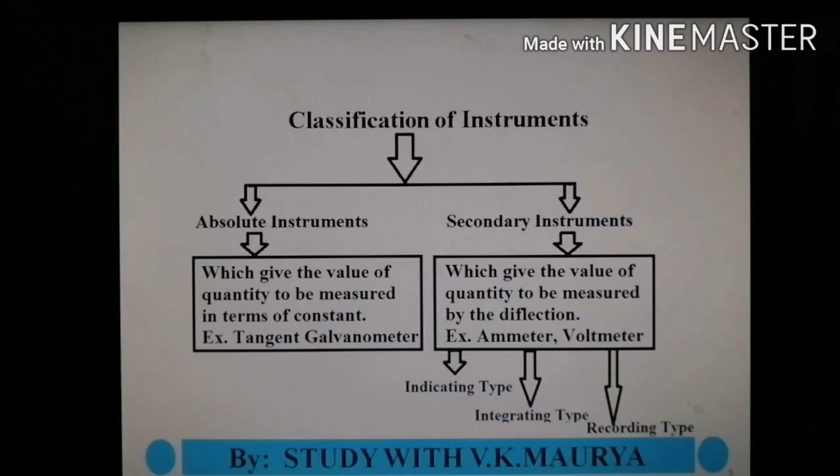Before these topics, see the classification of instruments. There are two classifications: one is absolute instruments and the second is secondary instruments. The absolute instrument gives the value of quantity to be measured in terms of constant, like tangent galvanometer. The secondary instrument gives the value of quantity to be measured by deflection, like ammeter and voltmeter. Secondary instruments are further categorized in three categories: indicating type, integrating type and recording type.

See the first one, that is indicating type instrument. Those instruments which directly indicate the value of electrical quantity at the time when it is being measured are called indicating type instruments, like voltmeter, ammeter, wattmeter, etc.

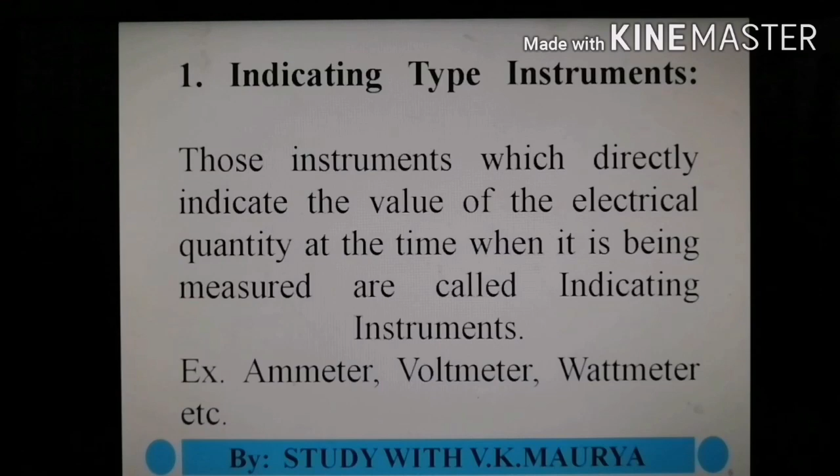The second one is the integrating type instrument. Those instruments which measure the total quantity of electricity in a given period are called integrating type instruments, like ampere hour meter, watt hour meter, etc.

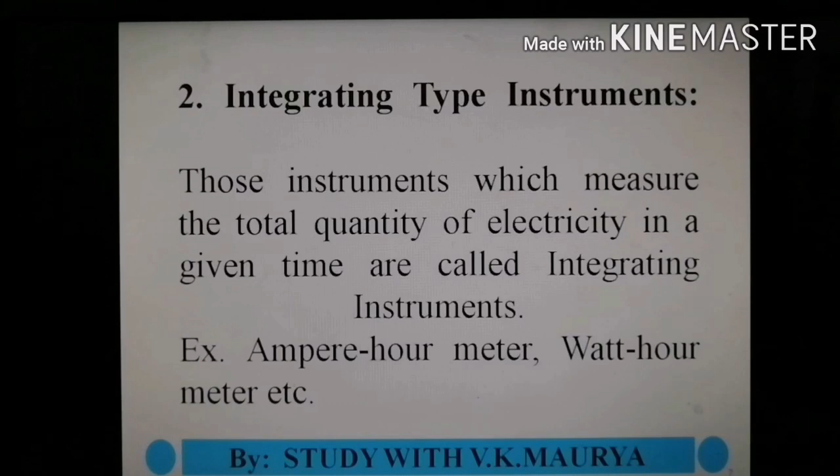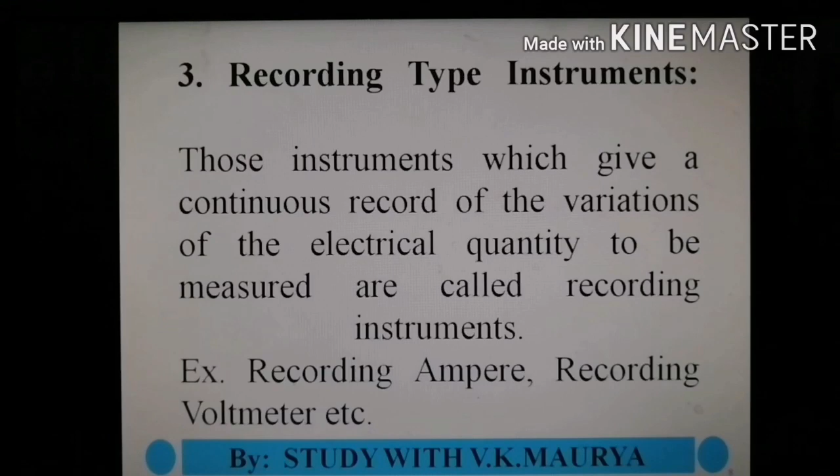And the third one is the recording type instrument. These instruments which give a continuous record of the variation of electrical quantity to be measured are called recording type instruments, like recording ampere meter, recording voltmeter, etc.

Now, indicating type instrument. In the case of indicating type instrument, three torques are required. This is our topic, different types of torque, right? Number one is deflecting torque, which is nothing but operating torque. Second one is controlling torque, also known as restoring torque. And the third one is damping torque.

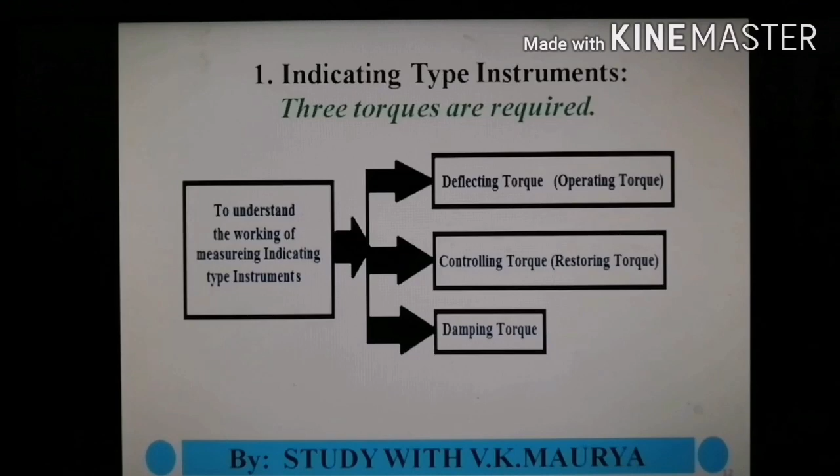Now see these torques one by one. Number one is deflecting torque. When the instrument is connected in the circuit to measure the given electrical quantity, deflecting or operating torque is produced, by which the pointer will move on the calibrated scale. It is one of the essential components required for the indicating type instrument.

I am explaining over here the effect of overswing. Although the current in this wire is 4 ampere, the pointer shows up to 5 ampere. Why is it so? The pointer will move from the 0 position up to 4 ampere, and due to inertia it will overswing beyond 4. This is known as the effect of overswing. Due to this torque, that is the deflecting torque, the pointer will swing over the maximum deflected position, irrespective of the magnitude of the quantity to be measured. Although the quantity is 4 ampere, due to the overswing its reading is more than 4 ampere.

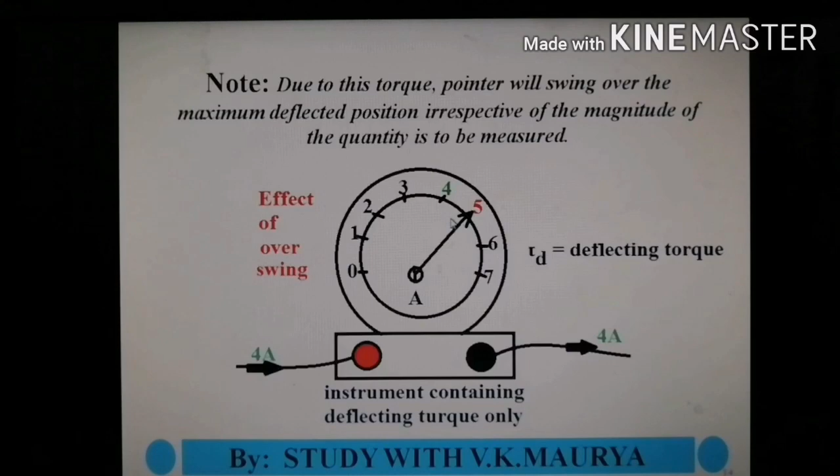Now the second one is the controlling torque. To avoid such conditions of over deflection or overswing, an opposing torque is necessary, known as controlling torque or restoring torque. This is the second essential component for the indicating type instruments. There are two types of controlling torques: one is known as spring control, second is gravity control. Now see the effect of controlling torque.

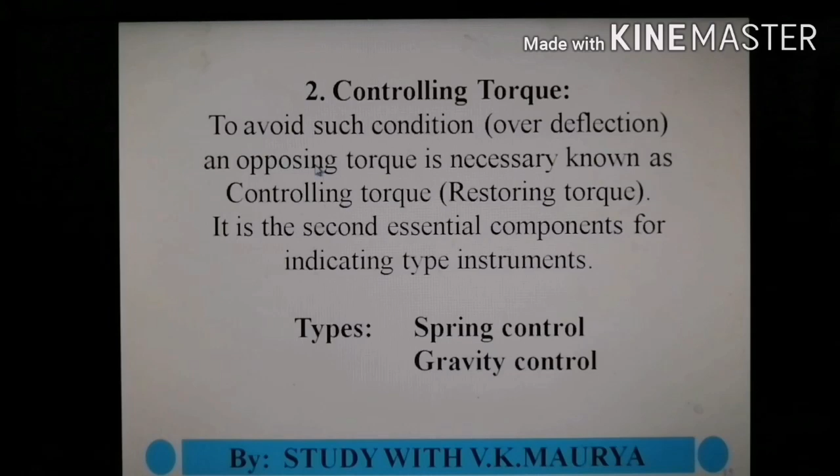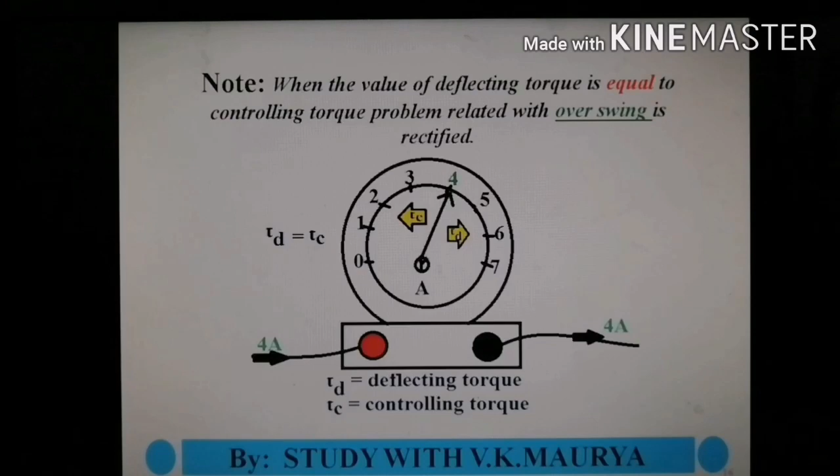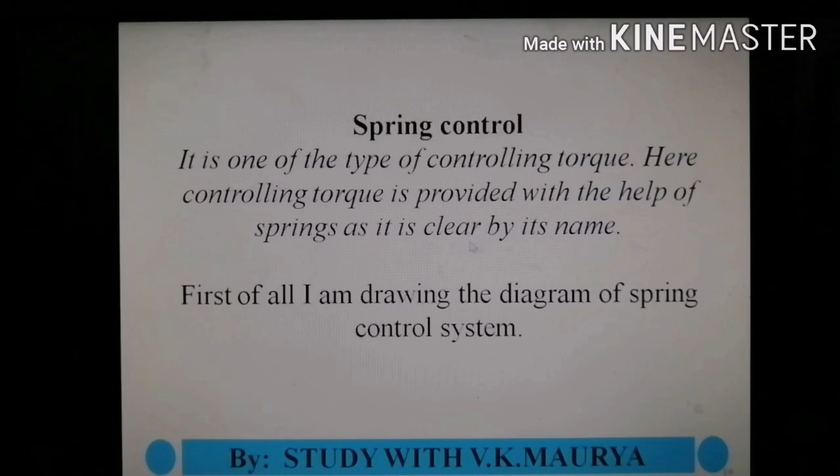These are the two types. Now I am going to explain one by one. The first one is spring control. First of all, the definition: it is one of the types of controlling torque. Here, controlling torque is provided with the help of spring, as is clear by its name.

See, this one is the spindle. These are the two springs, known as the control springs, and these springs are tightly attached with the spindle, which is provided for the controlling torque.

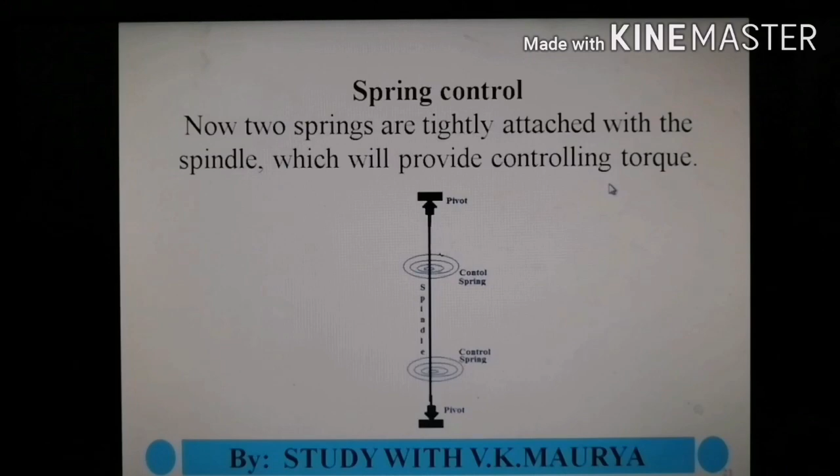After that, the pointer is also attached with the spindle, so that pointer will also move according to the effect of the spring.

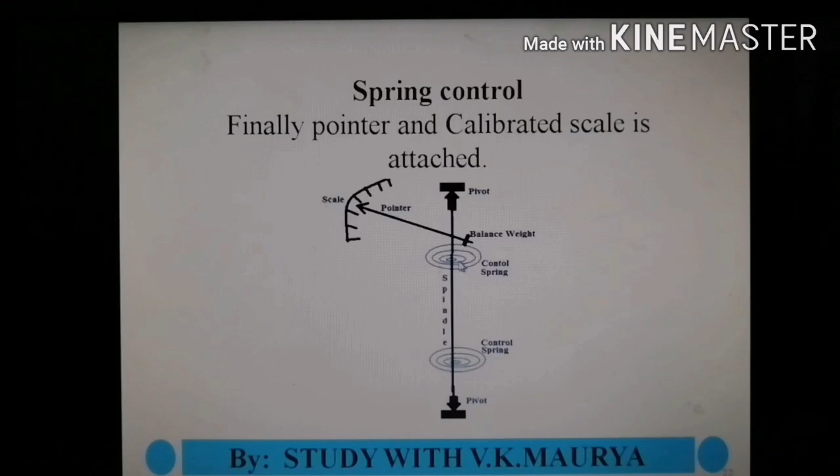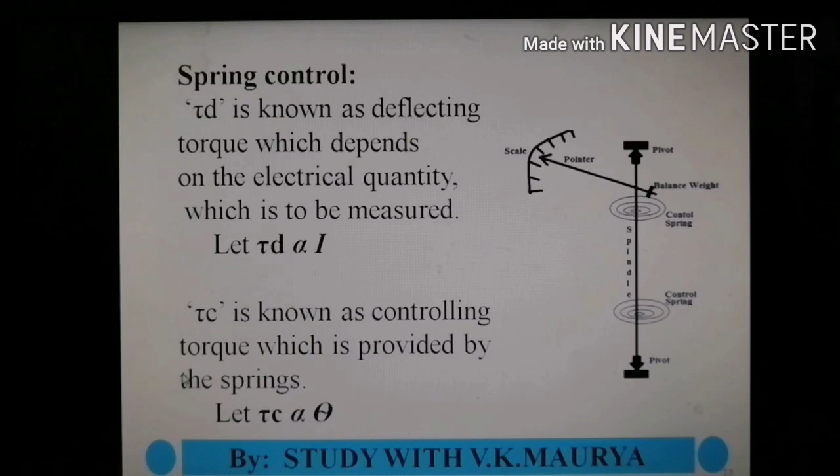Tau d is known as the deflecting torque, which depends on the electrical quantity to be measured, so tau d is proportional to I. Another torque given by the springs is known as the controlling torque, tau c, which is proportional to theta. At steady state, the pointer comes to rest when tau d equals tau c, meaning I is proportional to theta. This shows that deflection is directly proportional to the current, and the scale is uniform.

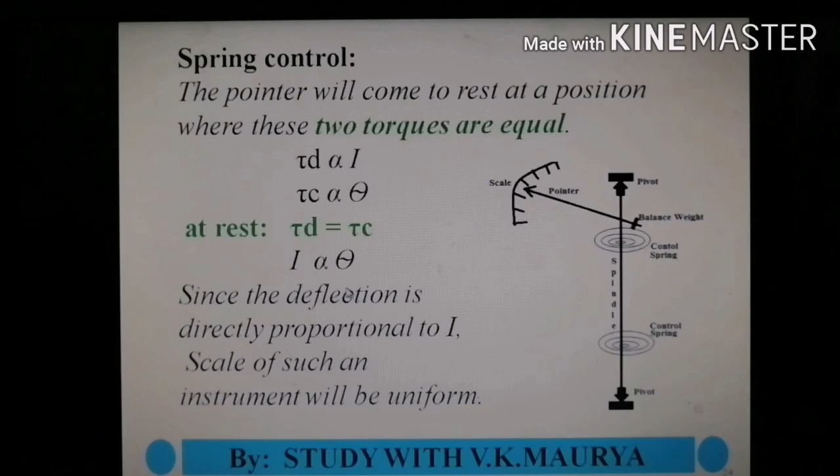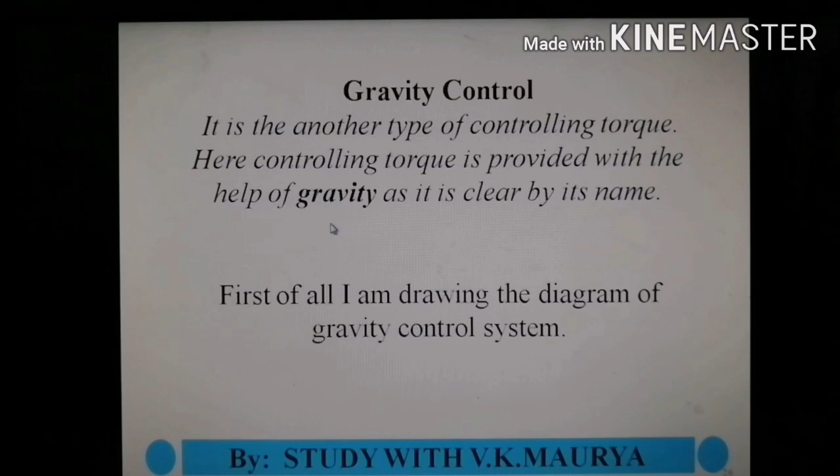Now the second one is gravity control. First the definition: it is another type of controlling torque, where the controlling torque is provided with the help of gravity, as is clear by its name.

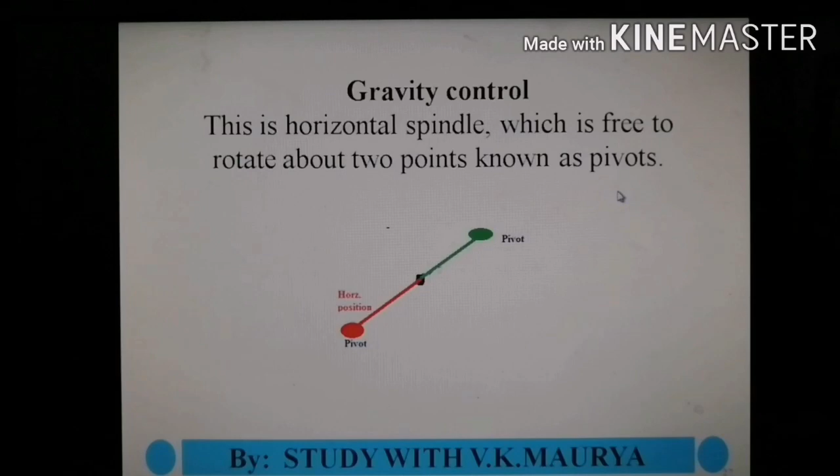This one is the spindle, a horizontal spindle which is free to rotate about its pivoted points. The pointer is attached with the horizontal spindle, and there are two weights known as the balance weight and control weight also attached with the pointer.

There are some important points. First, the position of such an instrument is always vertical. Second, the scale of such instruments is non-uniform — it is crowded at the start and spread at the end.

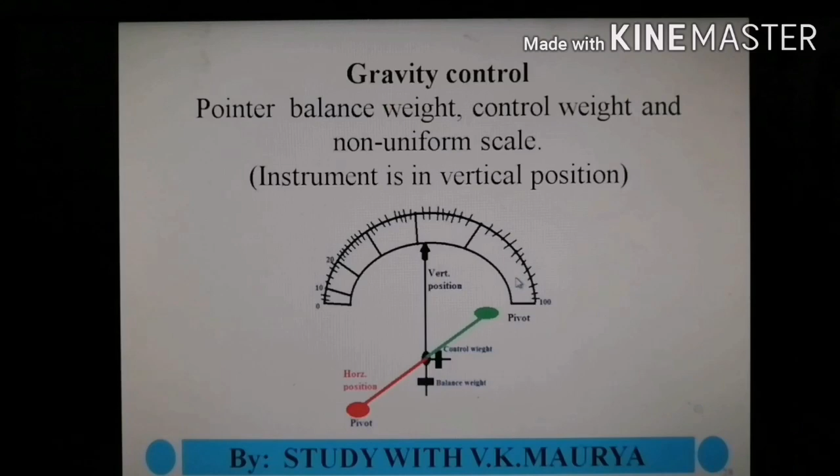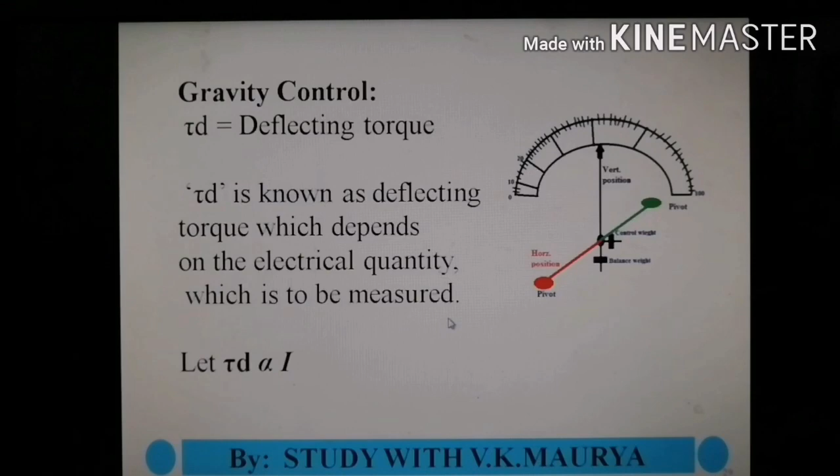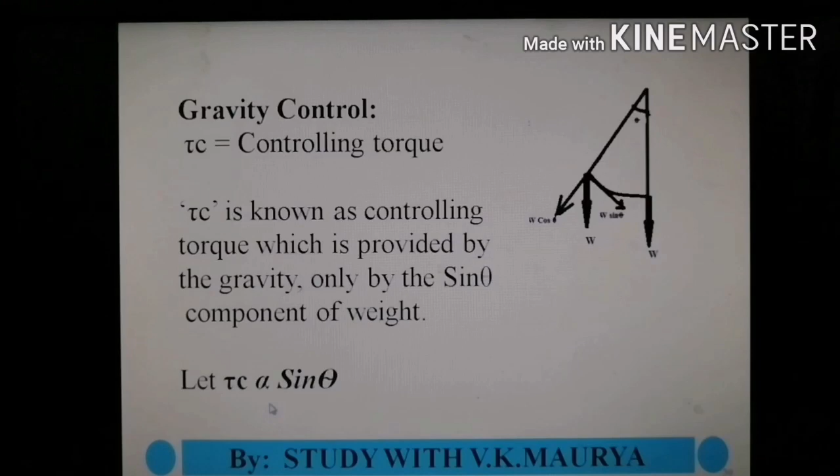Now what is the working of that? The deflecting torque is once again provided by the electrical quantity to be measured, so tau d is proportional to I. But in the case of the controlling torque, it is provided by gravity, or one component of the controlling weight, that is the sine component. So controlling torque is proportional not to theta, but to sine theta. That's why at steady state, when the deflecting torque equals the controlling torque, I is proportional to sine theta.

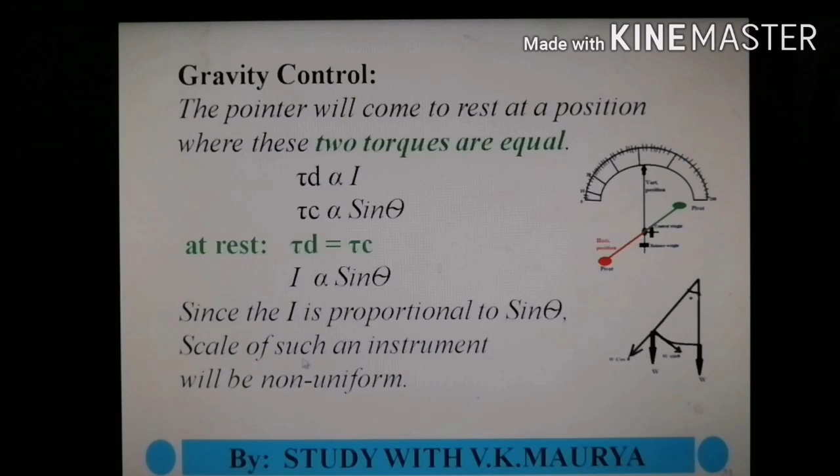I is proportional to sine theta, and the scale of such instruments will be non-uniform.

Now see the comparison chart between spring control and gravity control. First the advantages: in the case of spring control, it is accurate, sensitive and has a uniform scale. In the case of gravity control, advantages are accurate, sensitive and cheaper.

Now the disadvantages. Spring type instruments are costly, but gravity type are cheaper. There is fatigue in the case of spring type, but gravity type is free from fatigue. Spring type is dependent on temperature, while there is no effect of temperature in gravity type. There is no effect of position for spring type, but in gravity control, vertical position is necessary. The disadvantage of gravity control is a non-uniform scale.

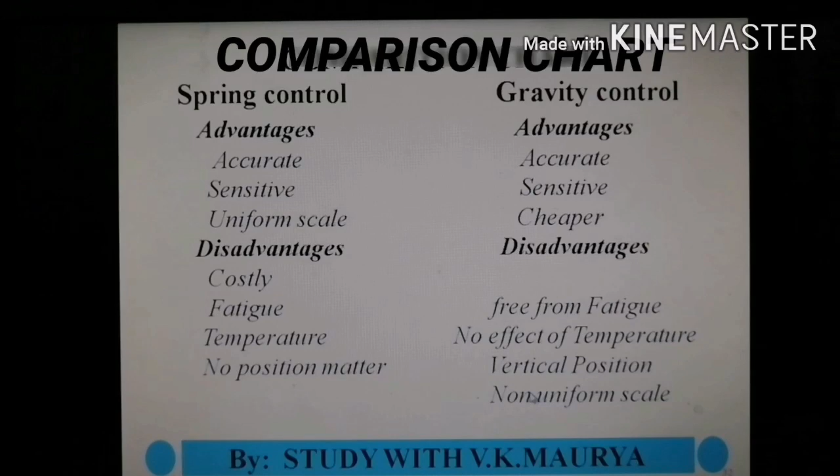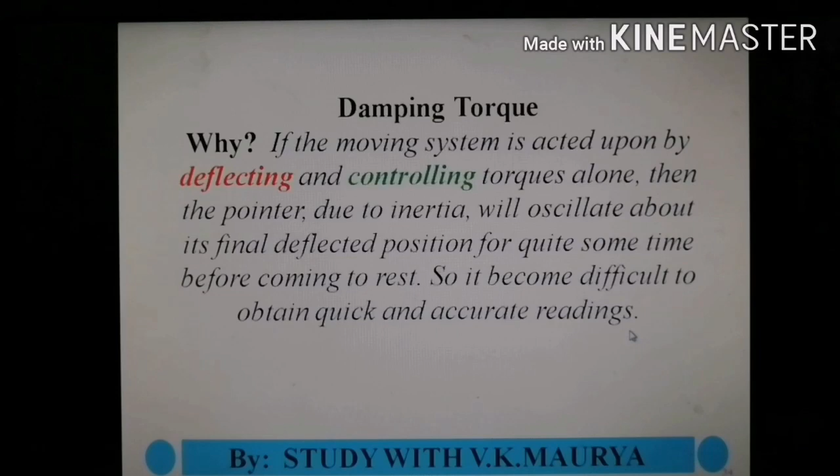Now the third component, that is damping torque. First the definition: if the moving system is acted upon by the deflecting and controlling torques alone — listen carefully, only these two torques — then the pointer, due to inertia, will oscillate about its final deflected position for quite some time before coming to rest, making it difficult to obtain quick and accurate readings.

That's why damping torque is required. In order to avoid these oscillations of the pointer and bring it quickly to its final deflected position, a damping torque is provided in the indicating instruments.

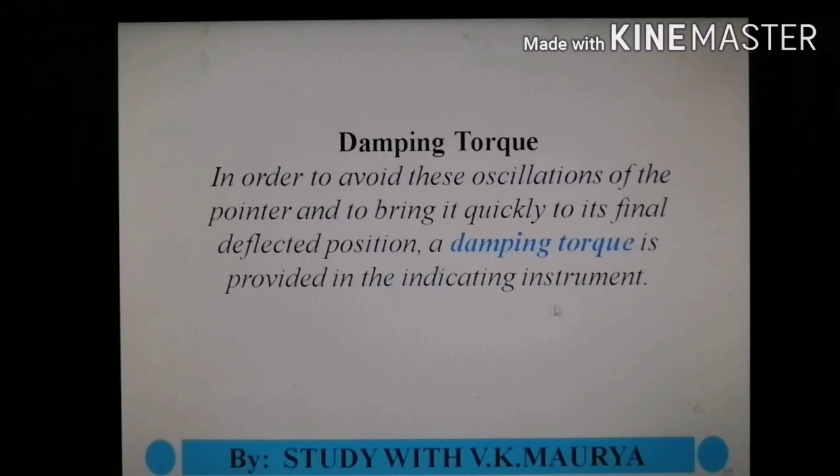Now listen about the damping torque. It is a self-adjusting torque that acts only when the pointer is in motion, and it opposes the motion. Damping torque does not act when the pointer is stationary.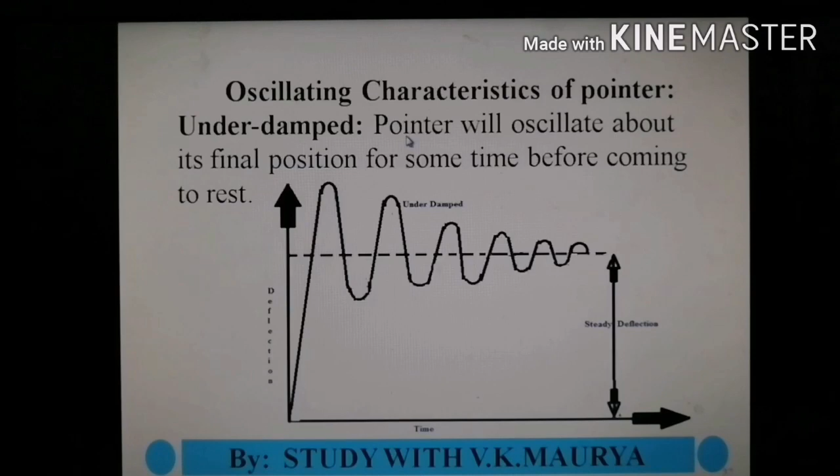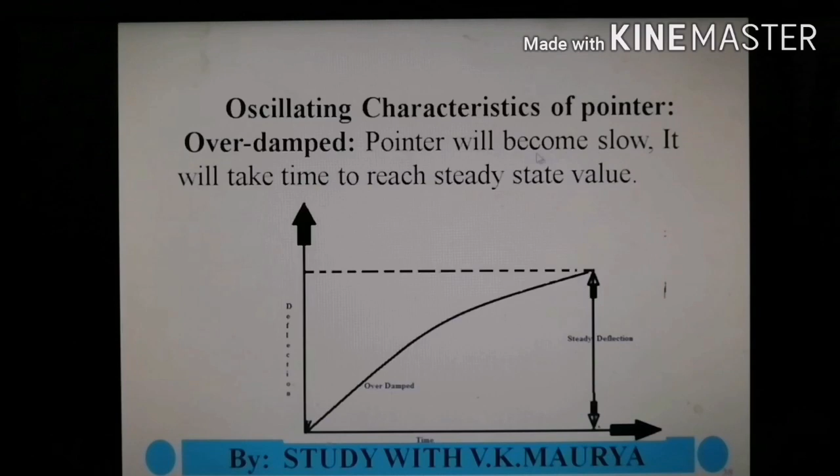Second one is the overdamped oscillations. The pointer will become slow and it will take time to reach the steady state value. Such type of oscillations are known as overdamped. The steady state position is achieved by the pointer with a lot of time, so it is known as overdamped.

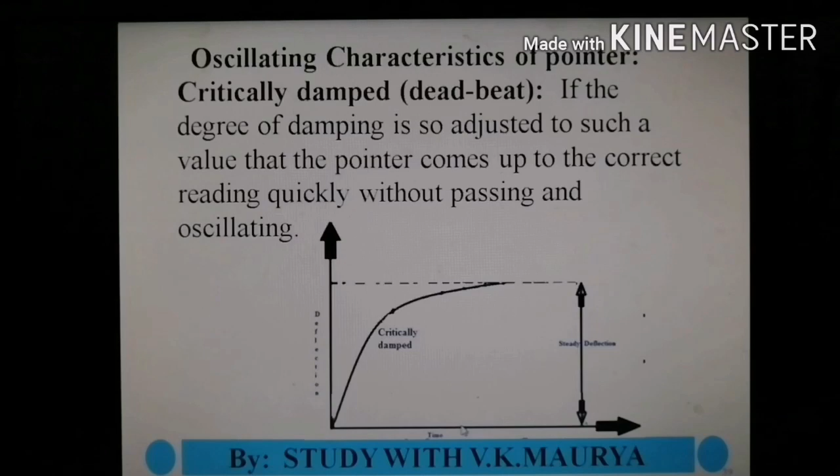Now third one is the critically damped or deadbeat oscillations. If the degree of damping is so adjusted to such a value that the pointer comes up to a correct reading quickly without passing it and oscillating. This one is the steady state value, and it is achieved by the pointer only in this time. That's why it is known as critically damped.

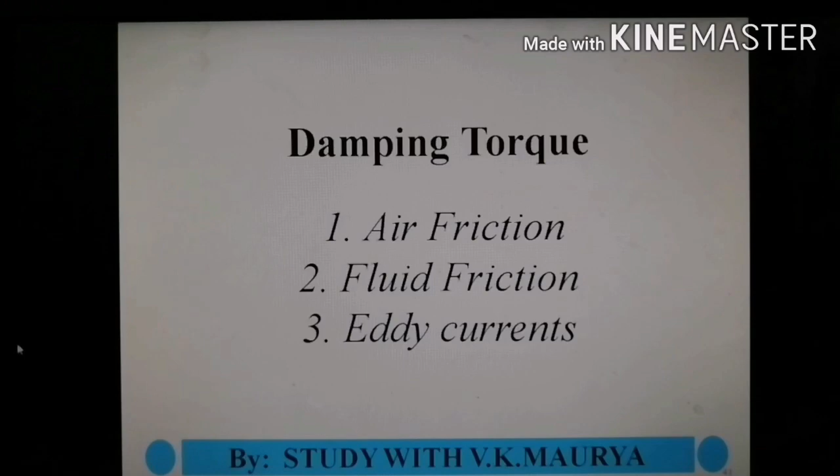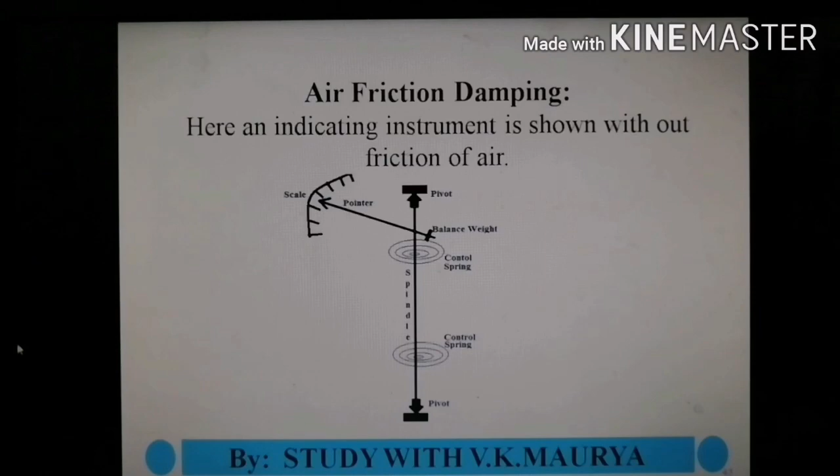See the first one, air friction damping. This is the normal arrangement: spindle, springs, pointer, scale, pivoted points, etc. Now see the arrangement of air friction damping: this one is the air chamber, this one is the piston, and the rod of the piston is attached with the spindle. There is a small hole for the flow of air.

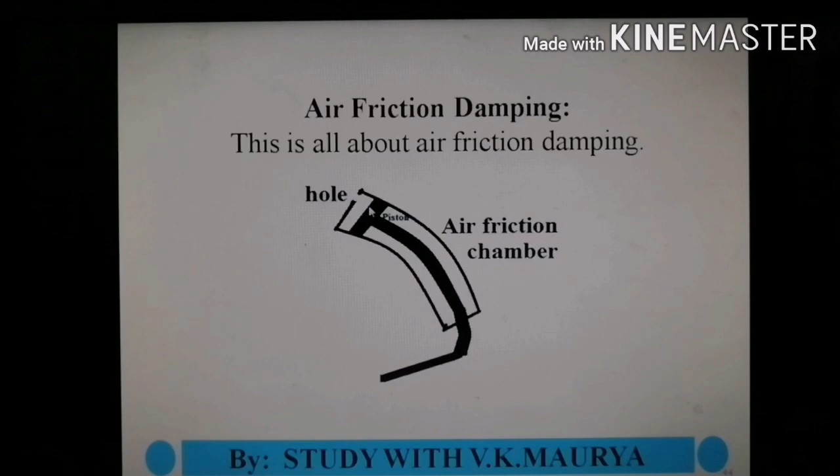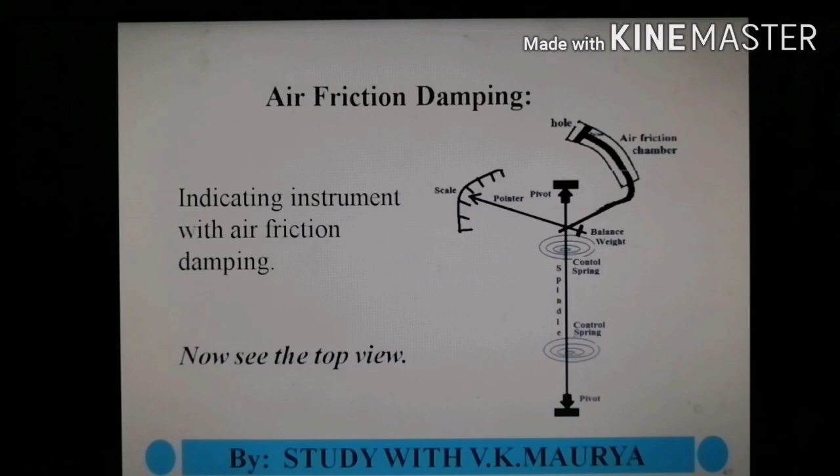Now see the air friction damping. According to the motion of this pointer under deflecting torque and controlling torque, smooth motion is provided to this pointer with the help of air friction damping. So the pointer will reach up to the steady state position in minimum time without oscillating, without vibrating. This one is deflecting torque, controlling torque, but the pointer will reach its steady state position without oscillating and vibrating.

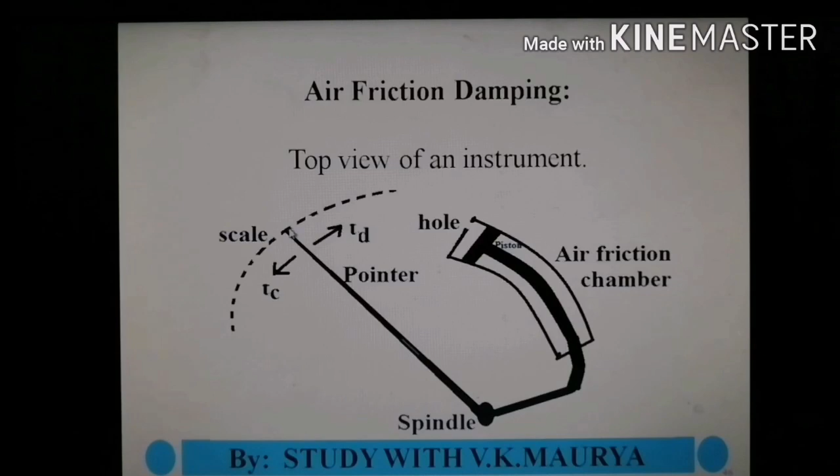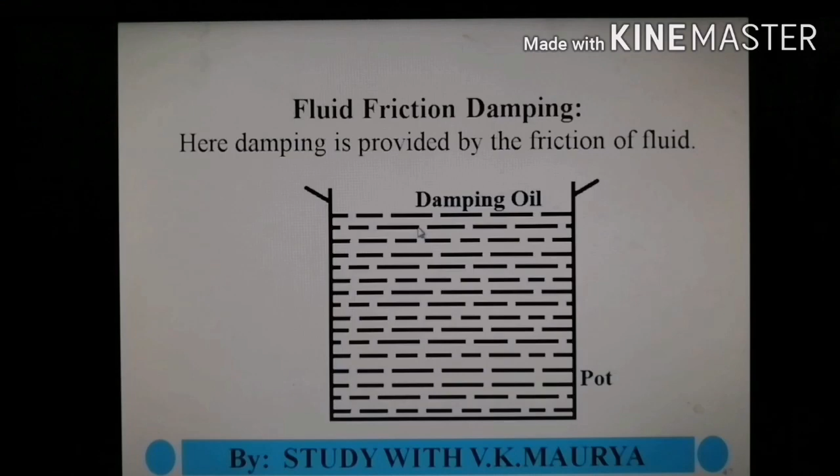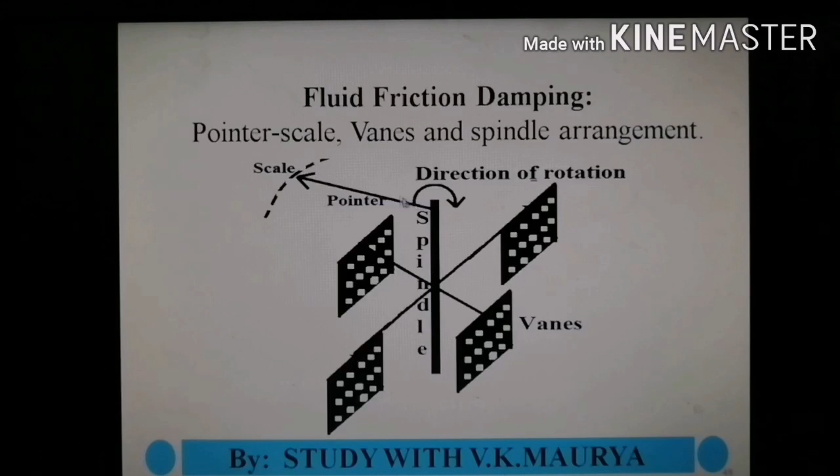Now the next one is fluid friction damping. In this case, a dense oil is here in this pot. These are the 4 vanes attached with the spindle, and the pointer is attached with the spindle. These vanes are inside the oil. Due to the high viscosity of this oil, smooth motion is provided to the pointer with the help of dense oil and vanes. There are small holes in the vanes through which fluid will pass.

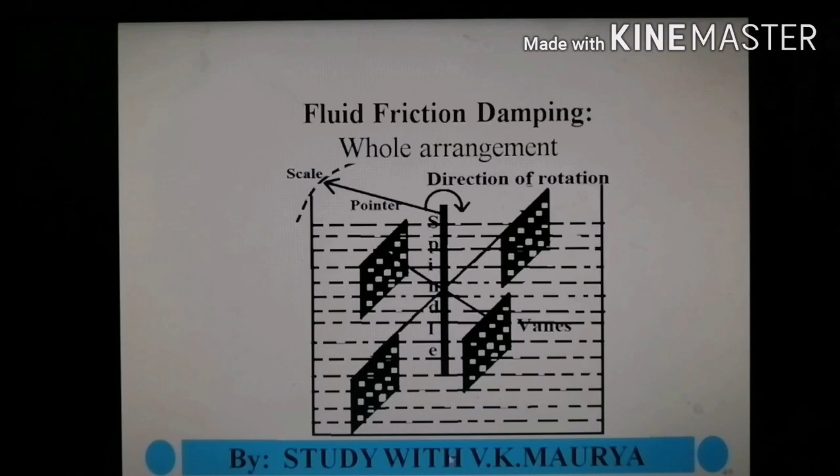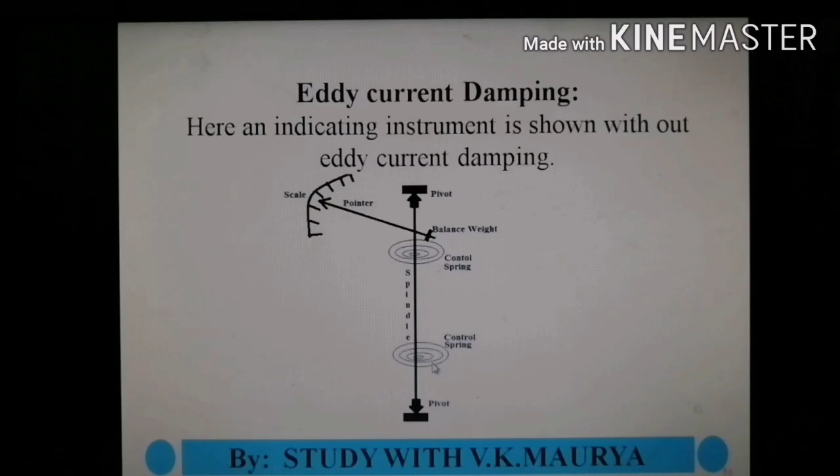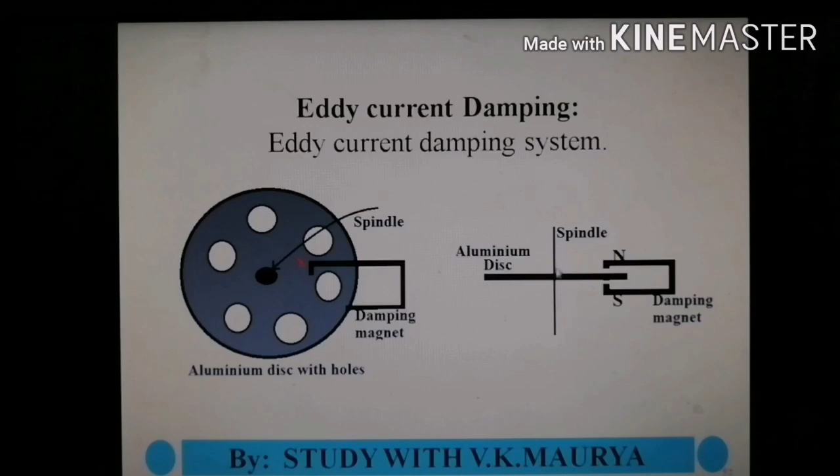Now the next one is eddy current damping. This one is a simple arrangement of the instrument: pointer, scale, spindle, springs, and pivoted points. Now see the eddy current damping. This one is the aluminum disc with so many holes, and this one is the spindle. The disc is free to rotate about the spindle and will pass in this gap. This one is the north pole, and at the other side there is the south pole of the damping magnet. B is the magnetic field produced by the north and south poles of the damping magnet.

There are a number of holes in the disc. When the disc rotates, the area changes. Due to the change in area and continuous magnetic field, it gives you change in flux as time passes on. That's why minus d phi upon dt gives you E, the induced EMF. When this EMF is divided by the resistance of the disc, there is a current known as eddy current, and it opposes the motion.

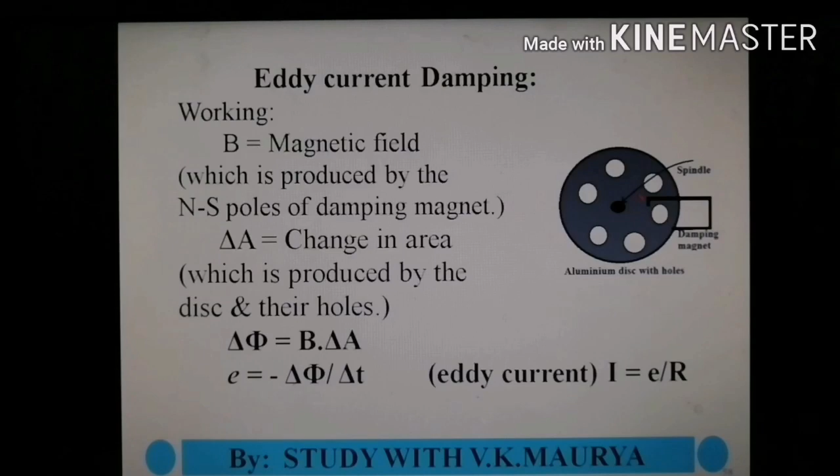See the working: B is the magnetic field produced by the damping magnet. Delta A is the change in area due to the several holes present in the aluminum disc. B into delta A gives you delta phi, the change in flux. As time passes, minus d phi upon dt is nothing but induced EMF. Once we divide this EMF by the resistance of the disc, there will be circulating currents known as eddy currents. These currents are responsible for opposing the motion, so it is known as eddy current damping.

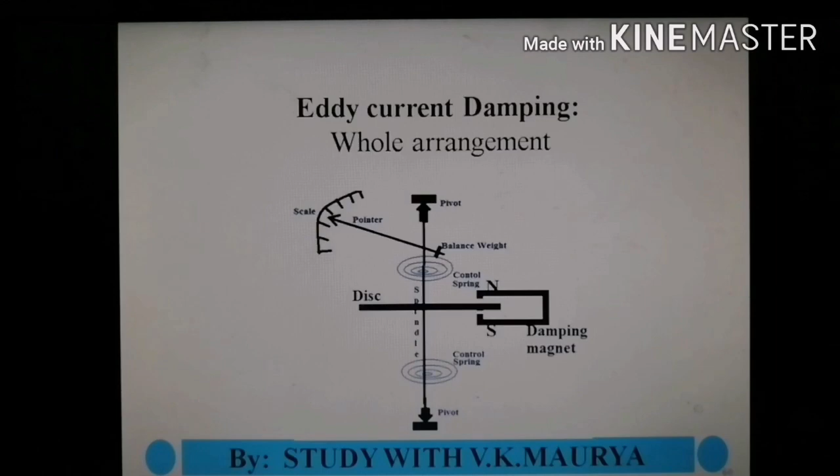Now see the instrument with the eddy current damping system. Now see what is the role of damping torque. Number 1, to avoid the effect of inertia. Number 2, to avoid oscillations about the steady state value. 3, smooth and gentle motion is provided to the pointer. 4th, the pointer will reach the steady state value in minimum time. And the 5th one is the reading should be accurate.

All three torques, deflecting torque, controlling torque and damping torque of the instrument, have been discussed.